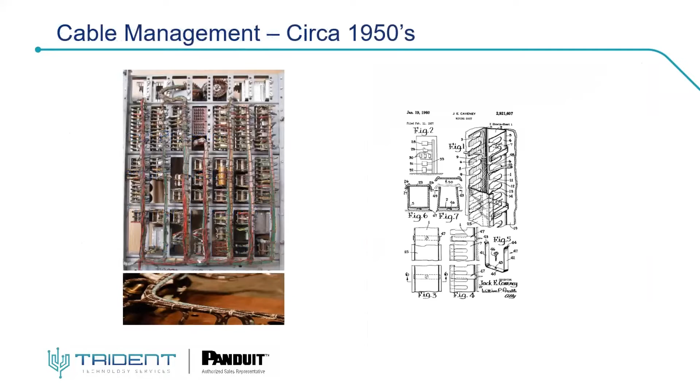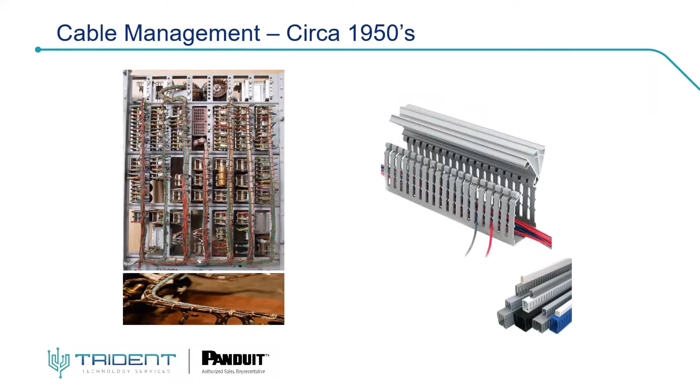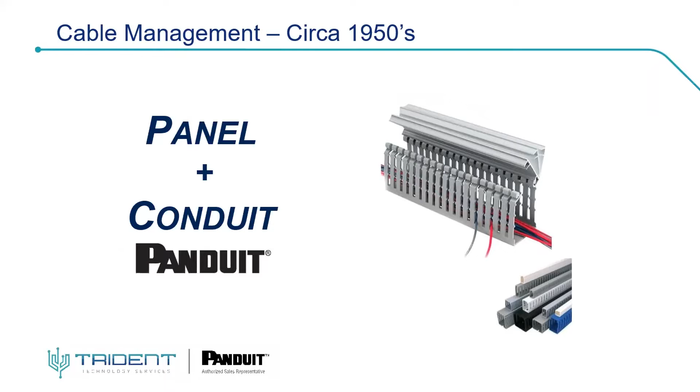As Shaima presented the agenda, I would like to start a little bit by telling where Panduit comes from. We are an American company, and the name Panduit basically comes from our founder, Mr. Caveney, who was working in the past with General Electric. He was working on solutions to provide a better way to route the cables into the cabinets. So he was working a lot in these panels and looking for a way to replace the whole installation of the cables with a good system, the conduit of the cable. So basically that's where the name Panduit comes from.

So the power of Panduit, we focus on 5 market segments. On the electrical side, we focus on industrial construction and maintenance and repair operation, mainly focused on the oil and gas market, shipbuilding, aviation. On the OEM side, the original equipment manufacturing, our second pillar or second segment in the electrical market, we look at original equipment manufacturers to see how we can provide the best solutions to route, to bundle, and to protect cables. On the other hand, we also have a huge variety of solutions for the enterprise and data centers, talking about cabinets, outlets, copper, fiber, all types of solutions for this market. And industrial automation is a kind of crossover between those segments.

Now, I'm going to speak a little bit about cable cleats because it's very important, not only when we speak about the electrical market, but also for the data center market. Whenever you install an electrical cable, you have to wonder, is there any risk for a short circuit event? And if there is, you should think about securing that cable to protect it in case of a short circuit event. Now, Panduit uses the IEC 61914:2015 standard to make sure that all the cable cleats we provide into the markets are in line with this standard.

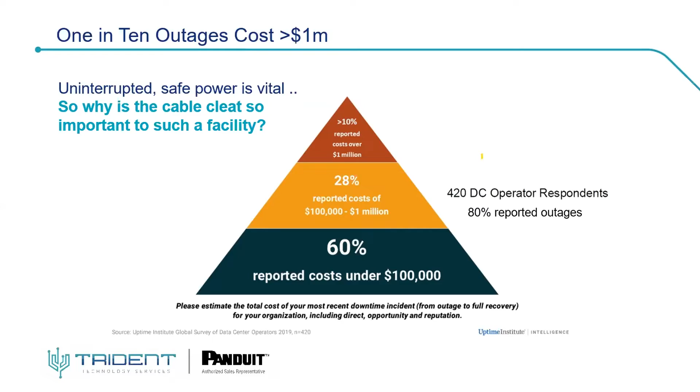It's not only to your equipment, but also to people, to your staff who are walking around in that area. It can be hurting these people, but it can even go as bad as killing them. So you really want to make sure that you install the cables in a correct way. Now we can speak a lot about what a short circuit event is, but it's sometimes better just to show what happens in case of a short circuit event.

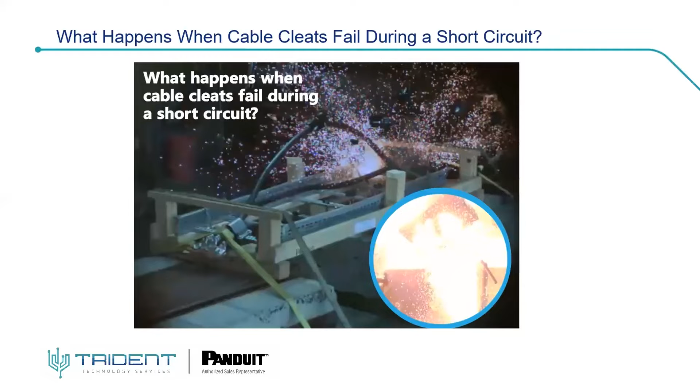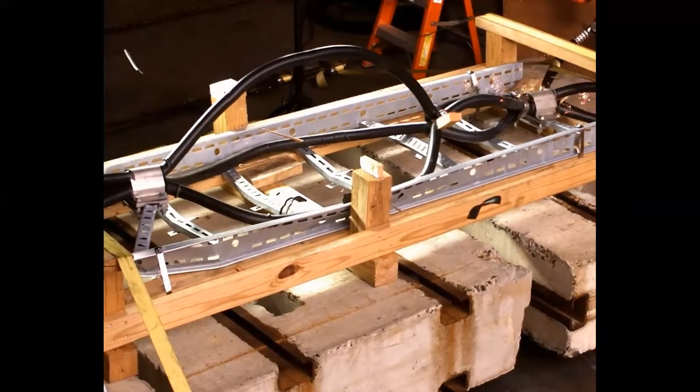Now what you see here, and also on the next slide, is what happens in case of a short circuit event. You see the forces are enormous. And as said before, you need to make sure you install a calculated solution. This is a test phase on a rig of about 4 meters. And as you see here, if a short circuit event happens, the cables will fly out. Now, this is a setup of 3 single core cables.

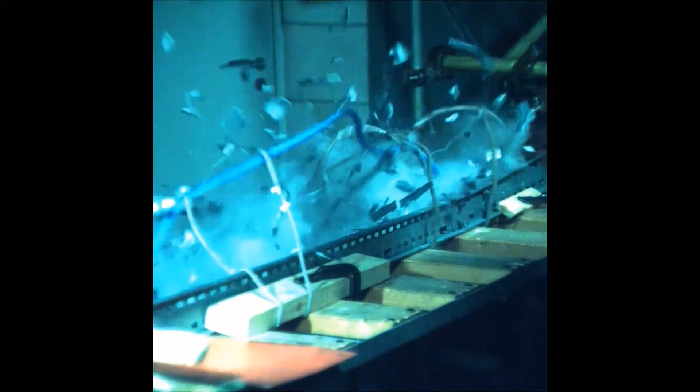And we often get the questions from our customers, does this also happen with a multi-core cable, even if it's an armored one? Now, the next slide will show you what happens in case of a multi-core. You see here this multi-core, and please keep in mind, all you see here happens in less than 1 second. So what you see here is that it completely devastates the whole area. So it's not only the ladder rack, it's the cables.

So can you imagine that this happens with cables that are set out for 20 meters, 50 meters? It is really, really bad for your complete environment. So again, if you look at this and you see the devastating effect of a short circuit event, you really have to consider all the cables that you are going to put out in the future or that you have already installed in the past. Did we secure them in case of a short circuit event?

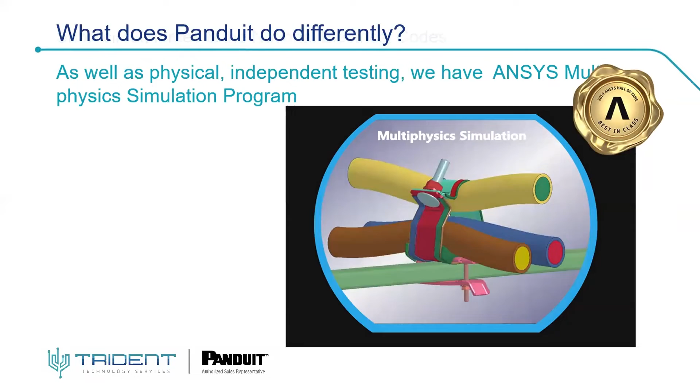Now, how did Panduit approach this market? What you can basically do is a test with each and every diameter of cable that you have, go to a test facility and test it, then look at the results. What Panduit actually did is we created with ANSYS software a simulation program, first to test what happens in case of a short circuit event. Because in case that short circuit event happens, you really want to make sure that for all the types of cables that you install, you do this according to a spec.

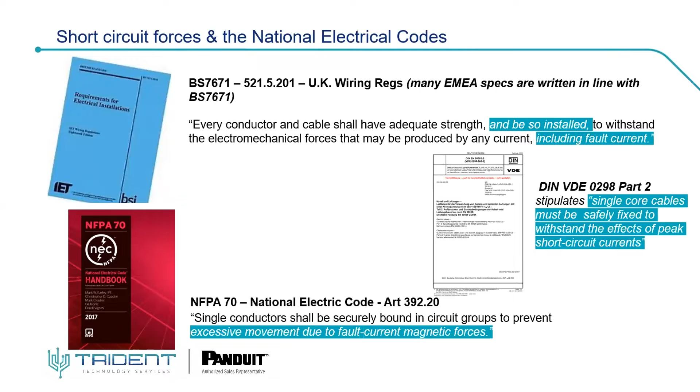Now, every country in the past had their own regulation. You see regulations from the UK, from Germany, from the US here on the bottom. What the IEC standard basically does is it combines all of the necessities that you need to install a secure cable for a short circuit event, and it's all been covered with the IEC regulation. Then we went again to a test facility with the results of our simulation software, and we went to test it again.

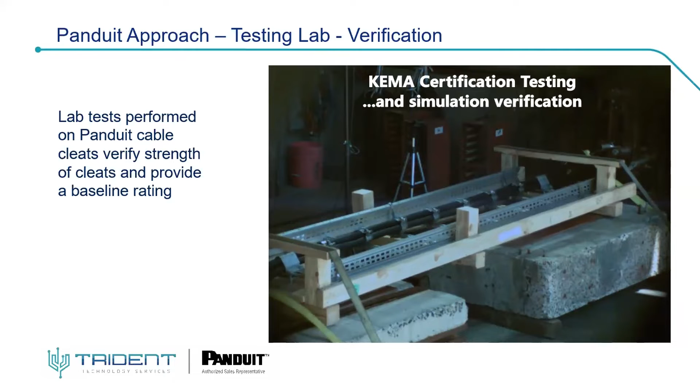Now, what you see here is also a short circuit event, but this is the way it is supposed to be. You'll see that the cables are moving on the cable tray, but they're staying on the ladder. And this is what you need to make sure of. Also here, you will see that our verification, the testing that we did from our simulation program, shows that the cable will stay in place on a short circuit event.

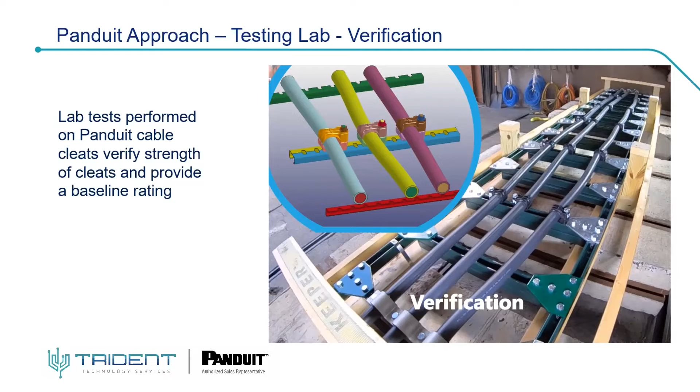This last one was a test of our polymer solutions that we also present into the market. The cables will move because the forces are so high. You just want to make sure that they are secured to the ladder and that they don't fly out. Now, as said before, it can also happen that our simulation program said that if the forces are so high, it will still go wrong.

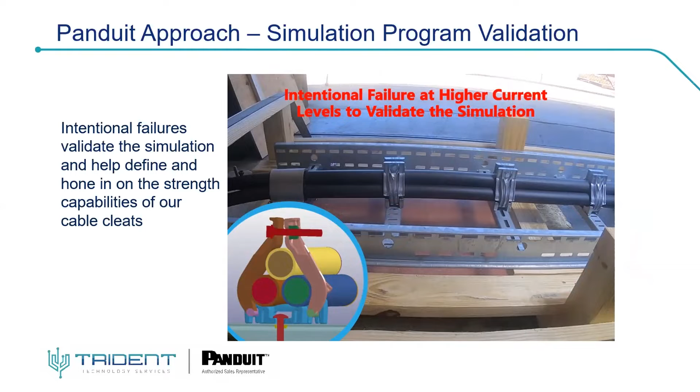You will see here an example of an aluminum trefoil setup and also a polymer trefoil setup. If the simulation software said that the forces are too high, you will see that it can still go wrong. Again, it's not because you secure your cables with a cable cleat that it's also valid in case of a short circuit event. That's why we always promote a calculated solution with a maximum peak current for each and every installation that you do.

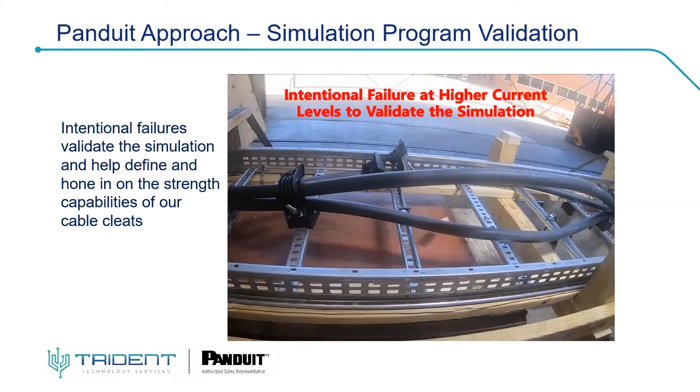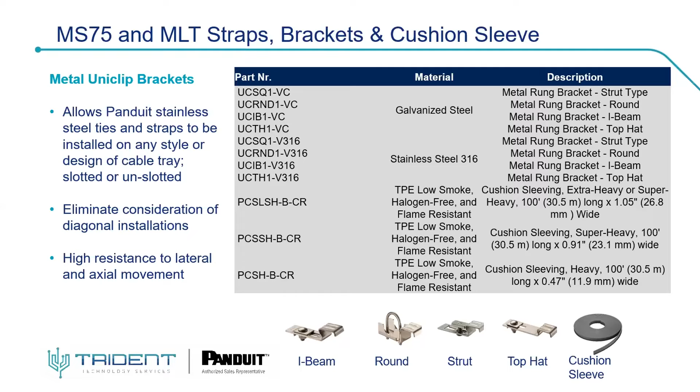You also need to use the right tools. Again, this is very important. If you're installing a double loop stainless steel cable tie, you want to make sure it's installed in the right way and that it's also cut off in the right way, because if you do it with a different tool, you may have the risk that you have sharp edges.

Now, if you still are convinced that you need to use a stainless steel cable cleat, we also provide these solutions into the market now. The big benefit of ours is, if you're looking at a Greenfield or a Brownfield, if the cables are already installed into the facility, our cable cleat shows that it's very easy to open it, to take 3 cables, in this case a trefoil setup, and still slide the bracket under it when the cable cleat is on top of the rung.

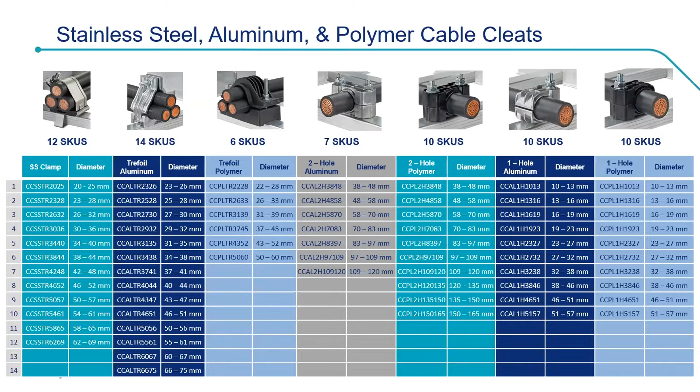Now, how do you actually define what is the right solution for you? There are different approaches to this. First of all, what you had to do in the past is you needed inputs: the outside diameter and the maximum peak current. If you also knew the spacing between the cleats, it was good. But previously, you always had to go to your manufacturer, request what type of cable cleats you needed to install, and you would get the answer.

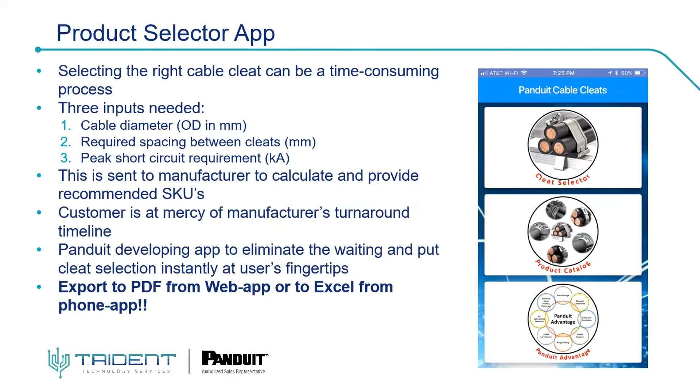There is a free app available that you can download on your phone, and you just put in the outside diameter and the maximum peak current, and the app will give you the exact cable cleat plus also the spacing. Here's an example of a cable of 55 outside diameter and a maximum peak current of 160 kA. It will tell you exactly what type of cable cleats you can use and also the spacing. There's all the information, all the specs of each and every cable cleat in it.

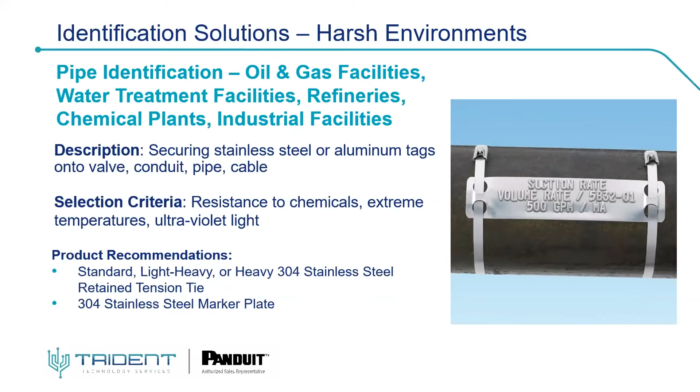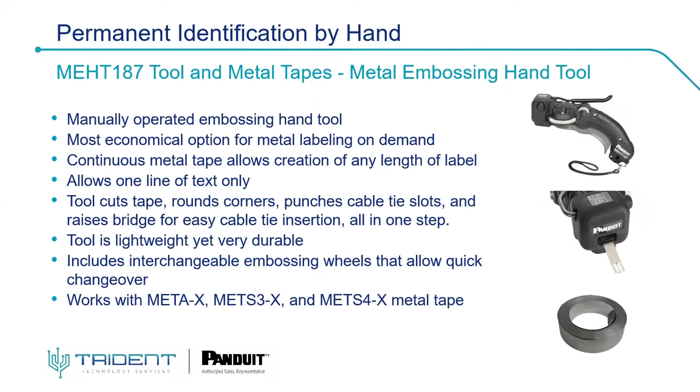So it means that you can put a lot of information on there to make sure that if you look at a cable and you need to identify it, all the information is on the stainless steel marker plate. Now, there are different types you can do. If you're out in the field, you can use a hand tool to create these marker plates.

Again, here, when you're working on a project, because there's usually a whole bulk of identification solutions that you have to install, we always recommend to do that with an embossing system. But if you're in the field and you're installing and you need a couple more marker plates, this tool comes in very handy, because it also creates marker plates depending on the material that you want, and you can manually emboss the information on the marker plate.

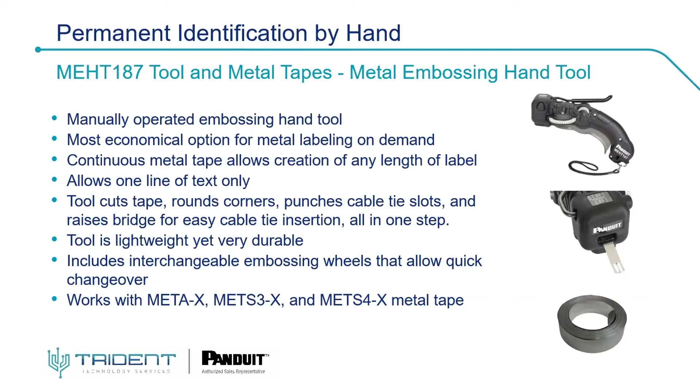The only downside, of course, is that you can only emboss on one line. So if you look at the embossing system, you can do up to 3 lines. Depending on the height of the character, you can do up to 18 or 25 characters on one line. With this tool, of course, you're limited to only one line.

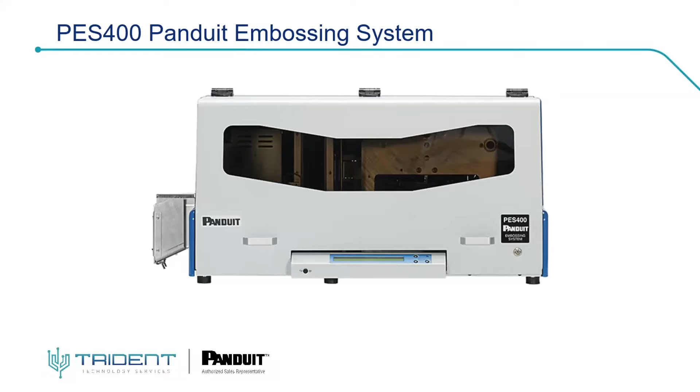And this is the embossing system. It used to be a portable system. It's no more, because it's about 80 kilo. But this allows you to make these marker plates in a very fast way, so that you can make sure that the information on there is permanent. Combine it with a stainless steel cable tie, and you can make sure that the cable is identified until eternity, as I should say.

There's a huge variety. This is also a big advantage. There's a huge variety of different marker plates that you can use with this machine. It all comes down to the amount of information that you need, the amount of characters on a marker plate, to make sure that all your information is on there. But maybe it's also very limited. You only need to use 8 characters, 10 characters, and only one line.

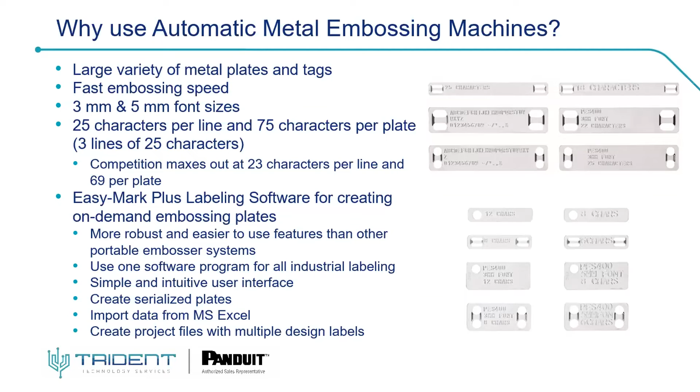Again, there's an EasyMark software that comes with the embossing system that allows you to import data from Excel sheets directly into the embossing system so that you do not have to do this all manually. There's also a big margin for errors if you do it manually. So if you import data from an Excel sheet, you really eliminate that.

So again, Henk, thank you very much for the presentation about cable cleats and our identification solutions. As you've mentioned, these cable cleat solutions have been developed in regards to safety. I would say that cable cleats are aligned with the safety of the equipment, but also the safety of the people who are working around these cables. Because in the videos you presented, we saw what impact a short circuit can have. And if you are close to such a cable at the moment the short circuit occurs, you can be hurt.

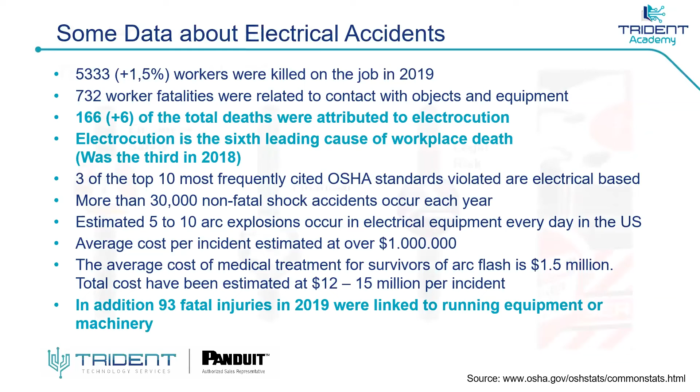And our engineers worked on that in order to develop a certain number of solutions. I will come to these solutions in the coming slides, but just to mention an important part, because often we think about people who are injured. The employee safety is effectively a key element when it comes to implementation of LOTO solutions. But I want to point out here, it's not only employee safety that is at risk. In case of accident, it can also generate financial and legal risks, because if the company doesn't apply the right safety products, the right LOTO solutions, you can get in trouble.

And even outside of the financial and the legal risk, think also about the impact that accidents can have on the brand, on the image of a company. So these are, let me say, hidden risks, hidden costs to an electrical accident, where we are thinking about the employee safety as criteria number one. And please keep that as number one, because effectively you cannot fix a price on an employee's life. But it's just to mention also that there are other costs related to such kind of accidents.

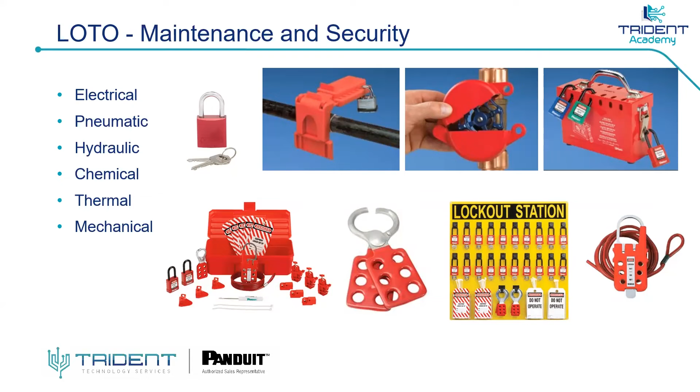Also, you see some locking systems. Please be aware that we have such padlocks, and that we can also provide key settings for specific needs, to have a key ranking system to really give you the maximum safety for padlock series that you want to install in your factories.

After the electrical safety, just a few words about the network infrastructure solutions that we have when it comes to lockout, tagout. In this case, we don't speak about people safety, but about your cybersecurity. You know that in the world we are living in, there are more and more intrusions. People try to get access to your data, to install a virus, or to export data in order to have a look at it. So please be aware that we have also solutions like the ones you see on the screen to block access to a USB connector, or to lock in or block out RJ45 connectors.

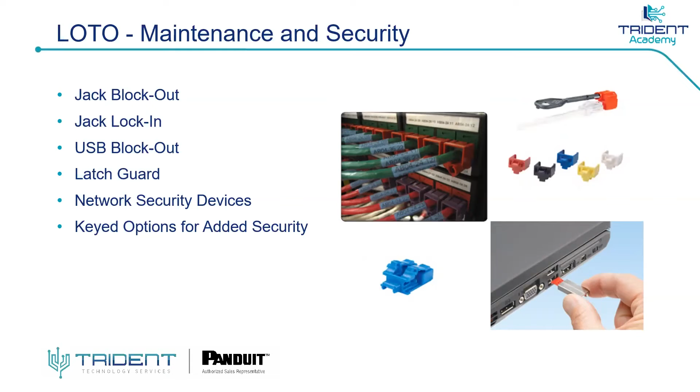I think this is something that is more and more crucial in the industrial world, especially in some strategic markets like oil and gas. We hear, with what's happening between Russia and Ukraine, how important oil and gas is today, and how people try to intrude into such systems. So cybersecurity and taking into consideration the risk of intrusion should also be a key aspect when you think about safety. These are basic mechanical solutions to improve the safety for your people or your network.

So perhaps you are asking yourself, why is he talking about disruptive? It's really because VeriSafe is a different solution from what you find in the market to do absence of voltage testing. Why? Because VeriSafe eliminates the risk for the users to be in contact with hazardous voltage when performing the absence of voltage test. Let me explain it. I hope you can see my screen.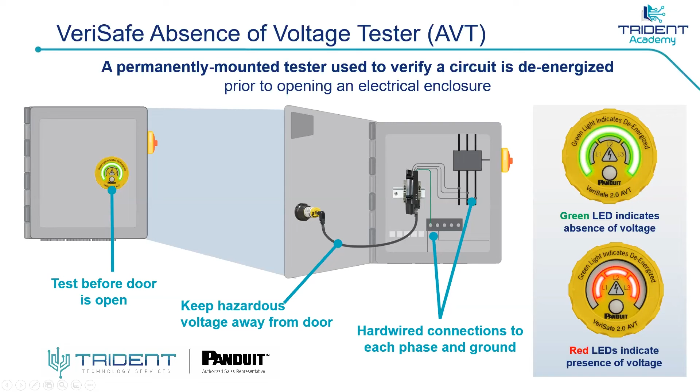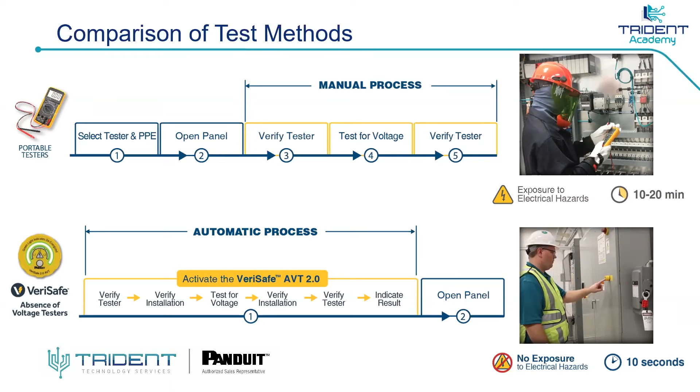Then to run the test, you will have to initiate the test by pushing this button here. The system will run these different tests and get back with a green light. That's the most common case. All is safe. You can open the door. You are in a safe environment.

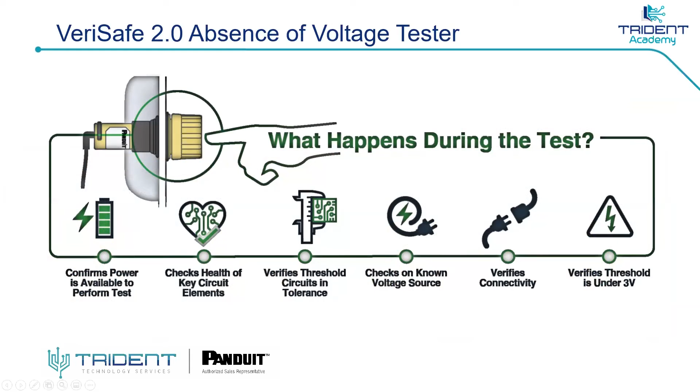If something happens during these tests, for example, if the connectivity is not confirmed as good, you will not get the green light, but you will have here a flashing orange light. Again, like when you drive your car and you see the orange light, it means take care. You are perhaps at risk. You need to make additional investigations. But this happens in very few cases. So in most cases, you will get the green light. If you get the orange light, it means take care.

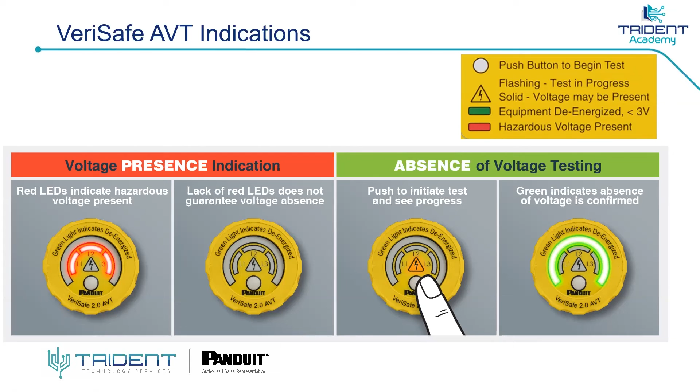I need to make additional tests or check for something that is going wrong inside the panel or the equipment. So I've mentioned it, it's a disruptive solution. So why should I trust in a solution like VeriSafe? And you see here a certain number of things that highlight the quality of VeriSafe, because VeriSafe provides reliable results.

Every test, when it goes to the green light, confirms the absence of voltage. The system gives you a result in a fraction of the time if you compare it to the portable handheld tester. I mentioned 10 seconds compared to 10 minutes. Also, something that is very important to know, due to the fact that the process is automated and simplified, you reduce the risk of human errors.

I don't know if you remember the first slide I presented with the figures regarding the number of accidents. Just a short story behind these. During the survey, the people who made the survey discovered that most of the people who had an electrical accident didn't follow the full process or made some errors during the process of testing with a handheld device. With VeriSafe, you reduce these human errors close to zero, let me say.

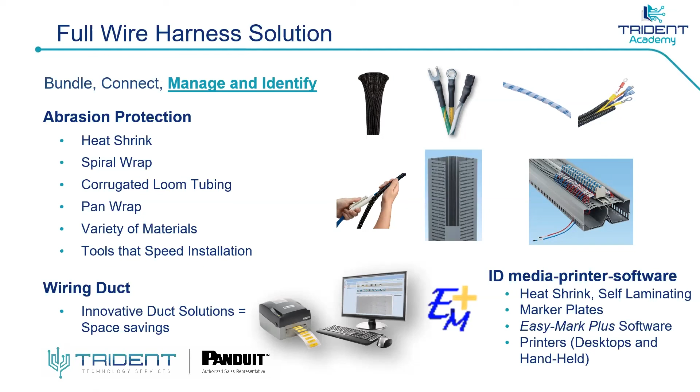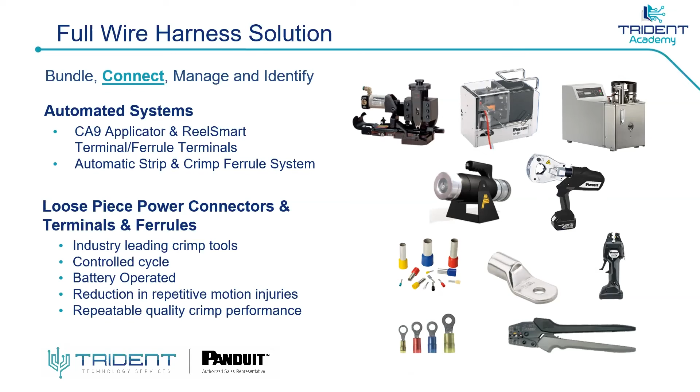The same is true for our Connect offering, in which you will find power connectors, terminals, and ferrules, as well as the loose pieces, but also the tools to put them in place: hand tools, semi-automatic or fully automated systems. And the third one, which is related to bundling, will include solution products like cable ties, mounts, installation tools, and

even solutions like a PAT system, which is an automated cable tie installation system, which allows you to install a cable tie on a harness in, let me say, less than 1 second. So it brings us back to the efficiency I've mentioned earlier in my presentation. So this was my last slide.